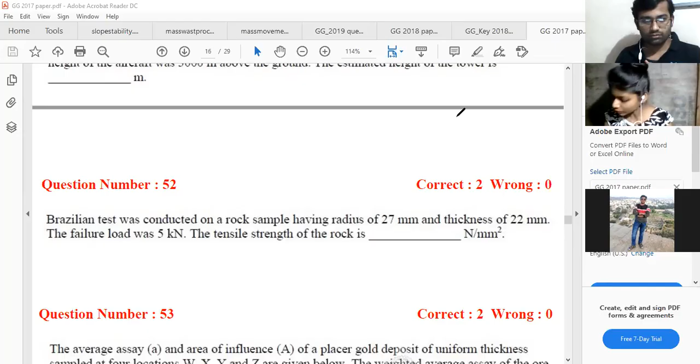Yes sir, but इसमें कुछ दिया नहीं है ना कि यूनिट मतलब कितने डेसिमल थी।

Yes, 2.68 is correct. बट सर इधर तो ऐसा कुछ दिया नहीं है, मेंशन नहीं किया, भूल गए होंगे वो। हाँ हमारी ट्रिक गड़बड़ हो गई ना। But in maximum cases you will get this instruction, up to 2 decimal place. I don't know why here is not mentioned। जनरली सर फिर 1 या 2 डेसिमल तक ही लिखना पड़ता है ना वैसे भी। हाँ नॉर्मली 2 डेसिमल।

अगर आप करेक्टली फॉर्मूला जानते हो और आंसर आ ही रहा है तो वैसे ही लिखो, ओके। यस सर। और जब गेस करते हो या फॉर्मूला नहीं मालूम तो उस केस में थोड़े थोड़े हिंट देखने पड़ते हैं। So here you know the formula, you can directly calculate with the help of formula। 2.68 Newton per mm square। फिर भी मुझे आंसर किसी का ही नहीं आया। अच्छा वो अप टू 2 डेसिमल की वजह से कंफ्यूज हो रहे थे क्या?

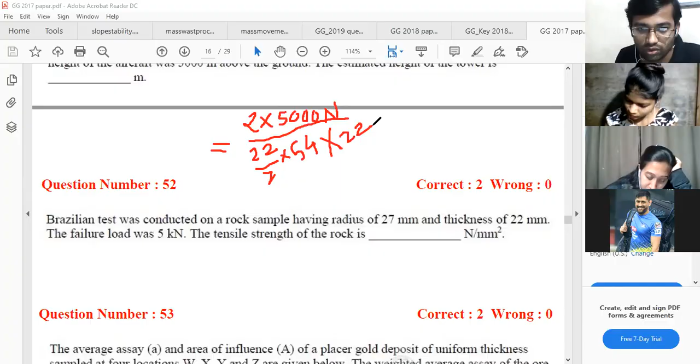22 by 7 multiplied by d, diameter, radius is given 27 mm, so double कर देंगे, we will get 54 mm, multiplied by pi d l. L is again thickness is given 22 mm, so 22 mm square। तो unit आ गया। So you can calculate this numerical with the help of unit also, very easy if you don't know the formula, still you can calculate with the help of unit।

Yes, but ये दो हम guess नहीं कर पाएंगे। So 22 by 7 कैंसिल होगा क्या? नहीं होगा। मैं ऊपर डाल देता हूँ इसको।

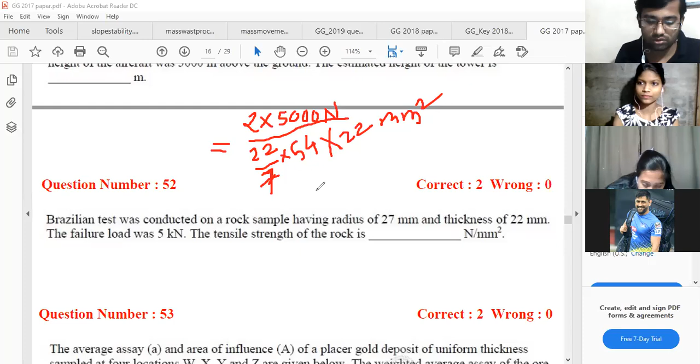So 22 multiplied by 22 multiplied by 54, 26136, 10,000 multiplied by 7, 70,000, 26136। So 2.67, okay, or 2.68, I will write 2.68 after rounding off। Final answer. Clear? Any doubt?

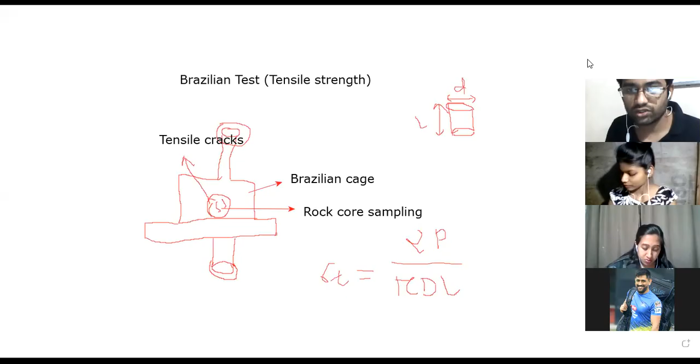Next is flexural strength. Okay, now this strength will come in play when we need to construct any beam or we need to check the strength of a beam। जो हम कंस्ट्रक्शन में बीम्स यूज़ करते हैं, स्लैब वगैरह डालने के लिए, for that beam you need to check this flexural strength।

Okay, this is what we are doing। We are using a cuboidal block, your beam, sorry, I will use cube here। Okay, sustain, so we are putting that particular rock like this।

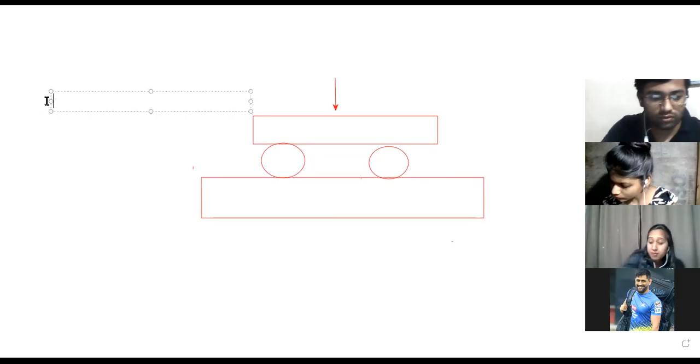Now, दो सर्कल के ऊपर बीम को रख दिए। This is actually your basement, and this middle one is your sample। Now two circular blocks are used to balance the beam।

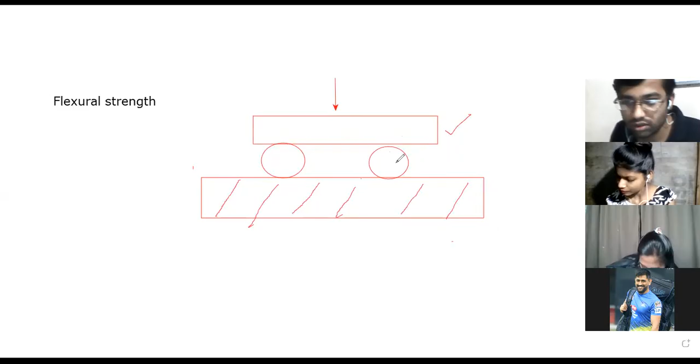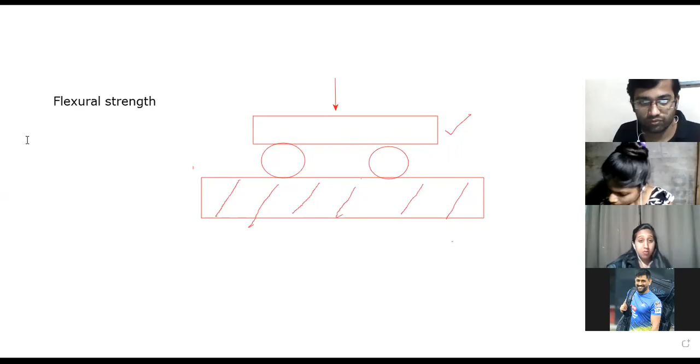And now we are applying vertical pressure। So here actually we are looking for transverse strength, what we are looking for, transverse strength। So if you are searching for bending loads, just like we need to construct the beams, you need to check whether it withstands particular pressure or not, otherwise ये bend होगा या break down हो जाएगा।

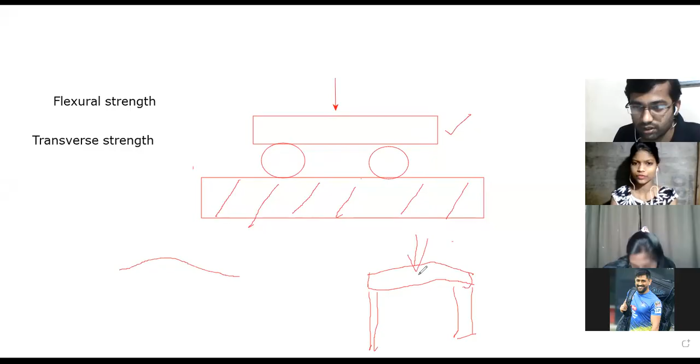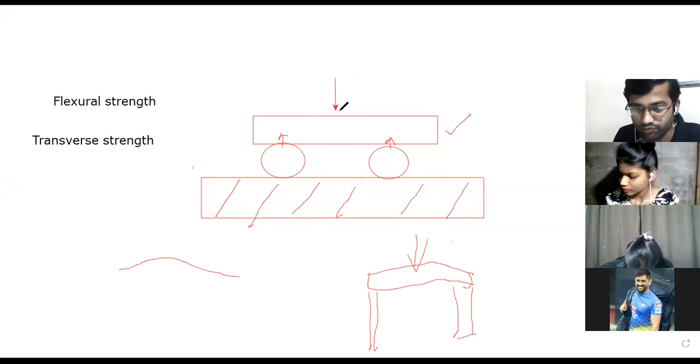For this reason we are doing this, because in construction what we are doing, ऐसे beam लगाएंगे। Now this beam is balanced with pillars like this, so instead of the pillars we are using here circular blocks at the ends of the beam। And now we are putting pressure at the center from vertical downward। So here two blocks are exerting the pressure from downward on the beam and from the above, so 3 points are applying the pressure।

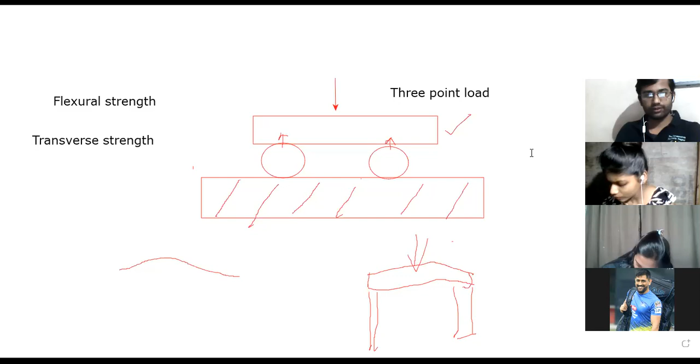So this is called as 3-point load, this test is called as 3-point load test। कर लिया ड्रॉ? Done, sir।

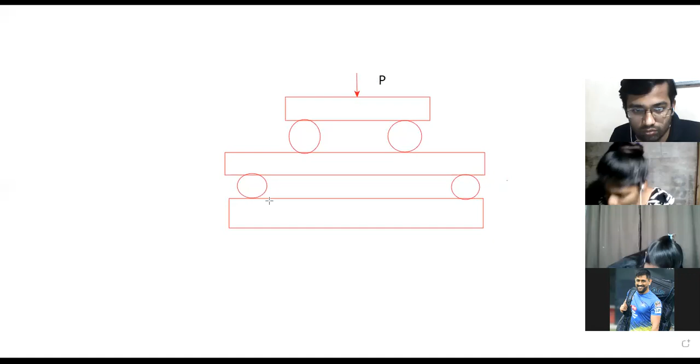Now again we have one more, 4-point load, एक से पहले दो। And this is your basement, like this। This is your basement, or you can say foundation for this particular test।

Okay. Now this is 4-point flexural strength test. Previously we have seen 3-point test. Okay. So here you can see 1 point, 2 point, 3 point, and point number 4. Okay. So this is your 4-point flexural.

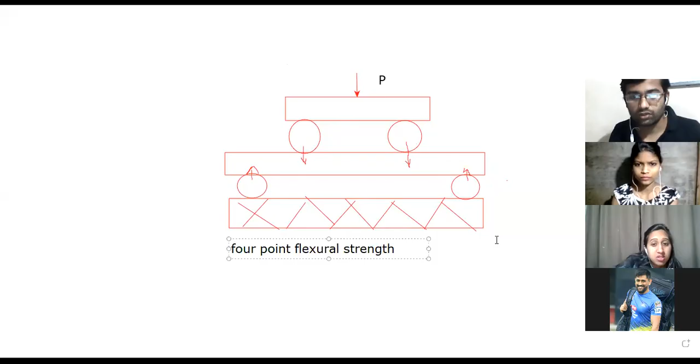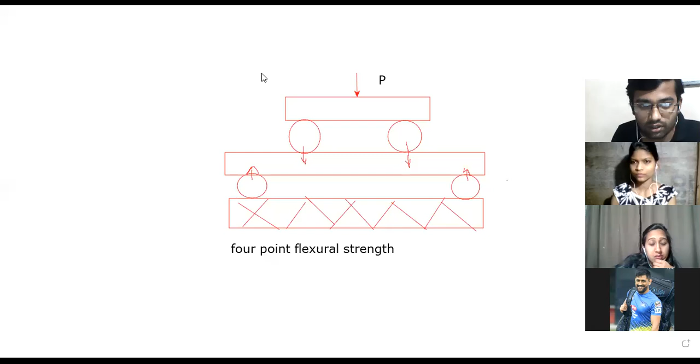Here P is on this beam. Okay, actually we are looking for this beam. Okay, this is our sample, okay, not this. Okay, got it. Okay, thank you. Okay, actually we are looking for this sample. Okay, I will use star mark here. Four-point flexural. Yeah.

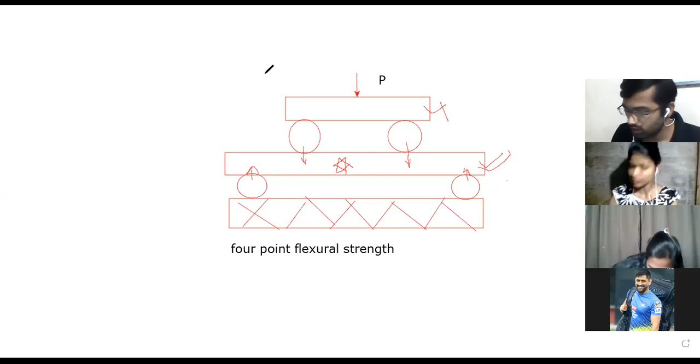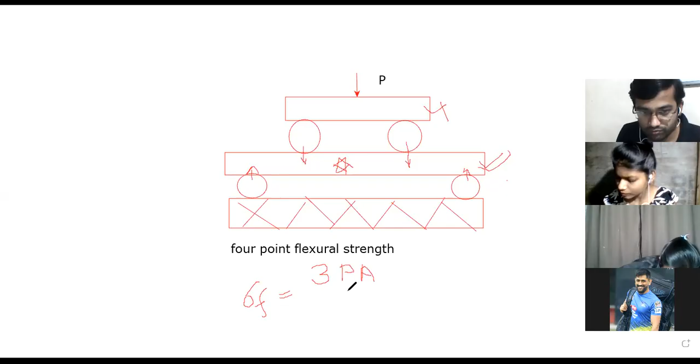So again we have formula for both 3-point and 4-point. So first write here formula for 4-point, sigma f. Okay. F representing flexural strength. 3PA divided by BD square. Okay. Again, P is the load at failure. Okay. A is your area. B is your width. Okay.

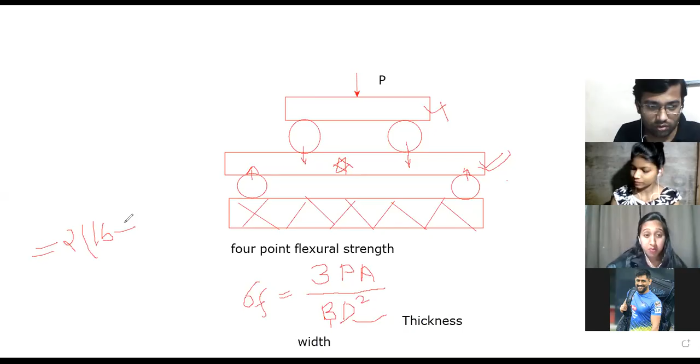Twice bracket L plus B plus, sorry, D is your thickness. LB plus BH plus HL. Okay.

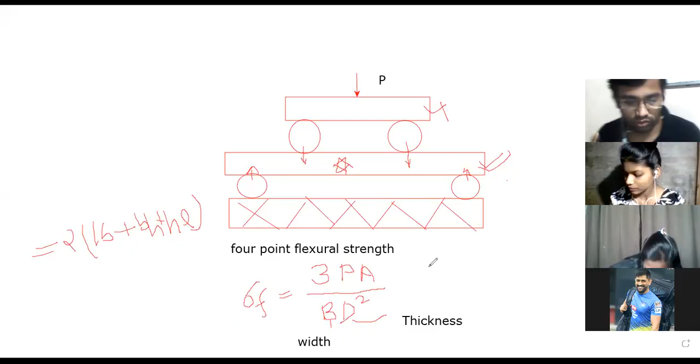Okay. See, basic mensuration formulas, you need to learn all the formulas. Mensuration for your ore geology actually. If they are saying your ore body is in cuboidal shape, so in that case, you need to calculate the volume of your cuboidal ore body. You should know this. At least volume. Clear?

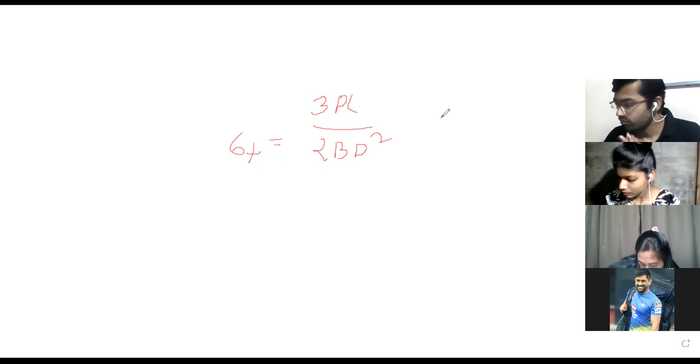Next, formula for 3-point. Okay, 3-point load. Sigma F is equal to 3PL divided by twice BD square. Okay. L is your length. Is it sigma T? Sigma F. Flexural strength. Clear?

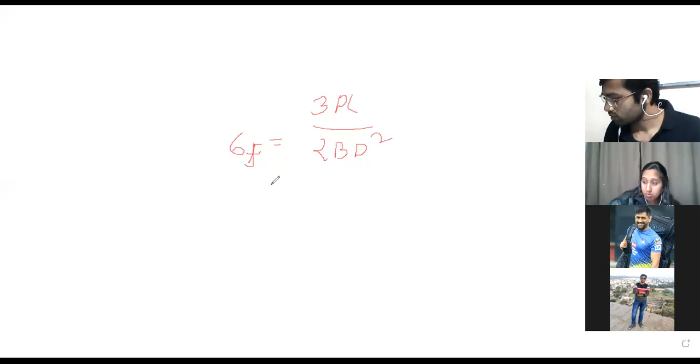Again, next property. Okay. Now we'll look for elastic properties. Elastic properties of rock. So we already studied about elastic properties in structural geology. And we'll again use the same formula, that is modulus ratio is equal to E divided by UCS. Now you will tell me what is E.

Unconfined compressive strength. E, I am talking about E. Elasticity. Extension. No. Okay. Think about the first numerical. We already used this formula in first numerical. Remember? Young modulus. Yes. E is your Young's modulus. Unconfined compressive strength UCS and modulus ratio. Okay.

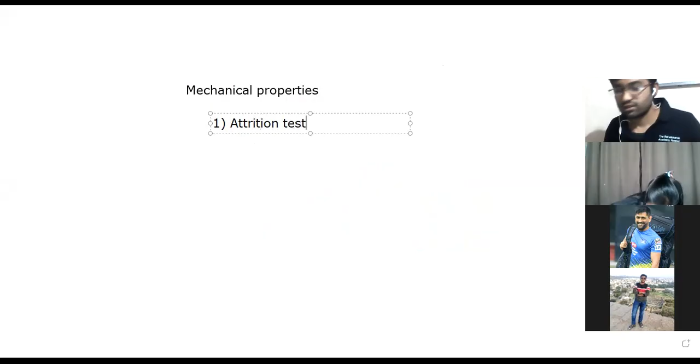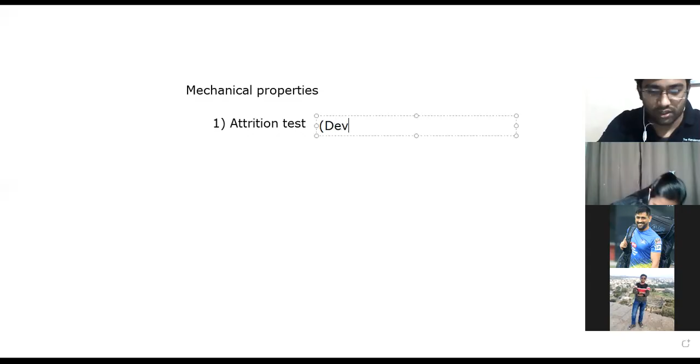Based on this formula, we already did a numerical. Next is your mechanical properties. Here we'll see first attrition test. Okay, now you know the attrition. What is attrition? For this test we use Deval's testing machine. Deval's testing machine.

Okay, what you will do? What is the attrition? Tell me first. Mutual collision. Yes, mutual collision. So what we do? We'll put the sample in particular chamber. Let's say this is your chamber. We put the sample in particular chamber along with the other rock fragments.

And we'll rotate the chamber so many times, so that all the rock fragments and sample can mutually collide with one another. And after doing particular rotation, some number of rotations are fixed, or duration is fixed. Let's say we are rotating for 1 hour. So after that we'll collect the sample.

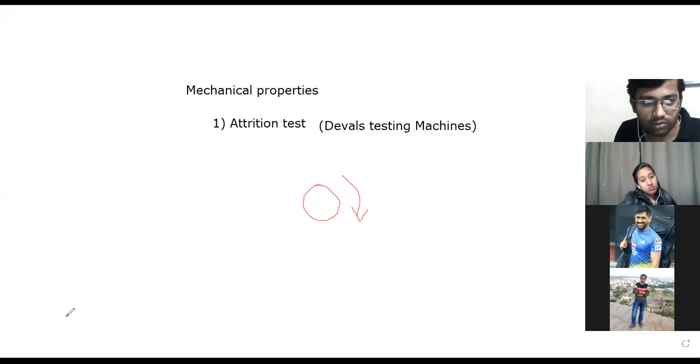Okay, we know the, yes, like a ball mill. Okay, and after the particular rotation or after the duration of particular time, we'll collect the sample. Now we know the quantity of the original sample जो हमने रखा था, and we'll find out the remaining sample.

If your sample is lost more than 3%, then the rock is not good for any construction. Let's say if your percentage of loss is less than 3%, then the rock is good; you can use that particular rock as a building stone or for construction material.

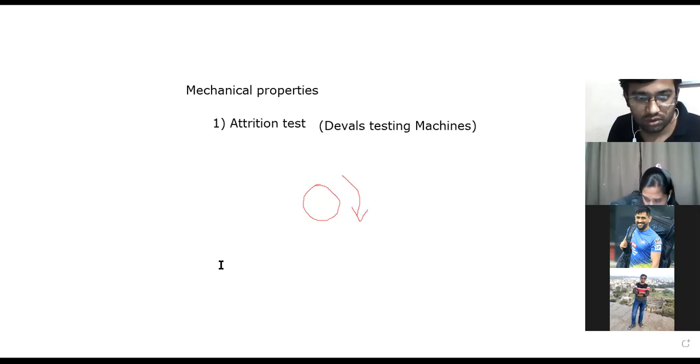So a loss due to attrition and wear, if it is less than 3%, is good. And if it is more than 3%, then it is unsatisfactory.

Okay, so again we have a formula for attrition test: percentage of wear in attrition.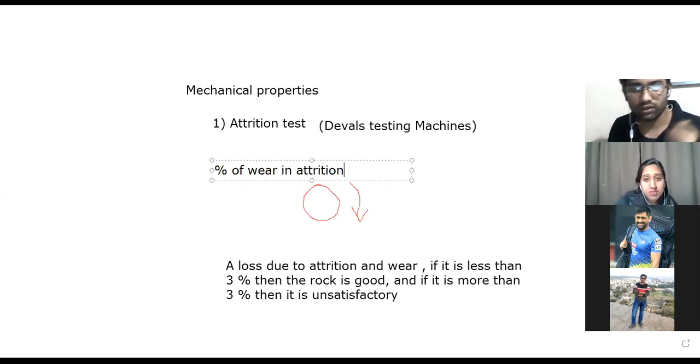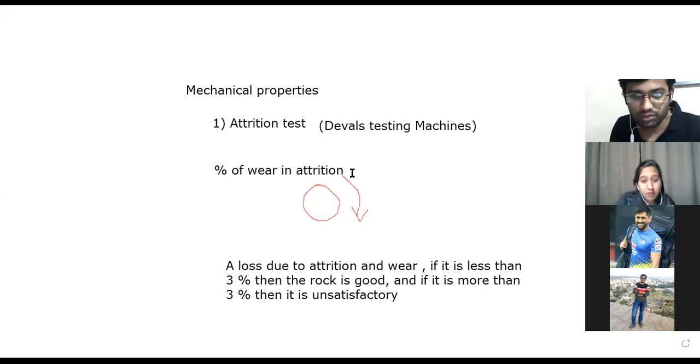If it is more than 3%, then it is unsatisfactory. If it is less than 3%, then it is good, and you can use the rock for your construction activity. So percentage of wear in attrition is equal to m1 minus m2 divided by m1, multiplied by 100.

m1 is your original weight, and m2 is retained material, means weight of the sample after the attrition, after the rotation. So you can say retained weight. m2 is your retained weight, m1 is your original weight. So you should divide with the original weight. Clear? m1 m2 clear हुआ? Yes, sir.

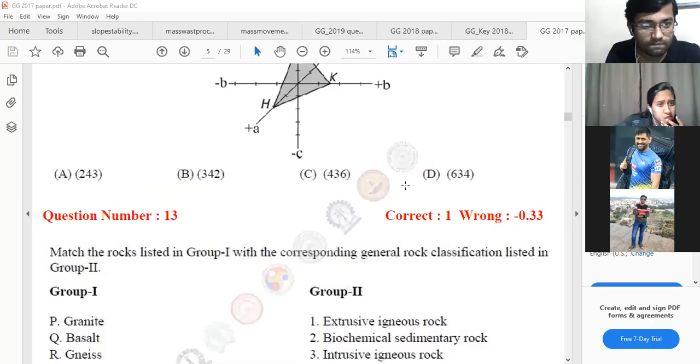Just one second. दिख नहीं रहा. Okay, leave it. I will share numericals on that. So this is about attrition test.

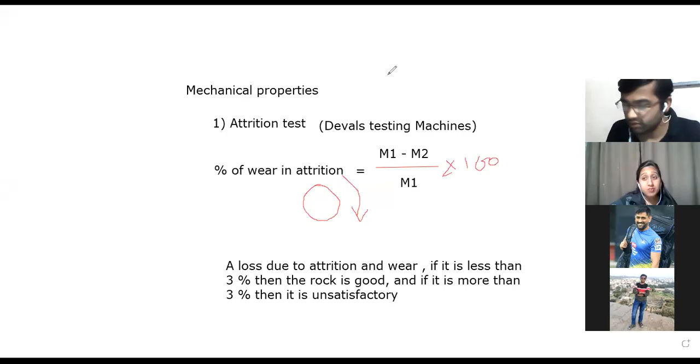Next is Los Angeles abrasion test. What is abrasion? Abrasion is friction between sediment and bedrock. So in abrasion we are rubbing the sample against the bedrock. The procedure is the same, but instead of bedrock, we are using steel balls.

So we'll put the sample. Let's say this is your sample, S. Then we are using steel balls in the chamber, steel balls and rock fragments. Then again we are rotating the chamber and looking for the loss of the sample.

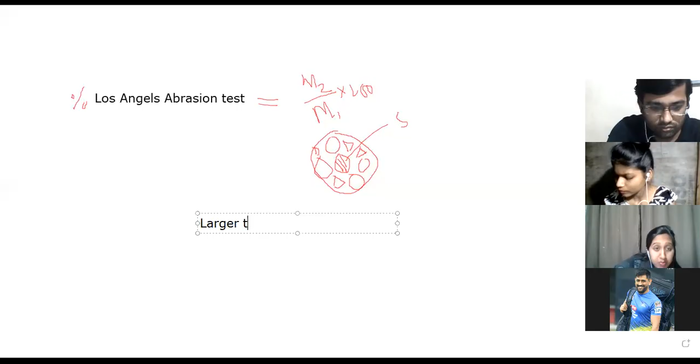Percentage Los Angeles abrasion value is equal to m2/m1 multiplied by 100. m1 is again your original weight, and m2 is your retained weight. So larger the value, weaker is the rock. In this case, up to 50% is permissible. If loss is up to 50%, we can consider it good quality.

Okay. Now solve this note, question number 9.

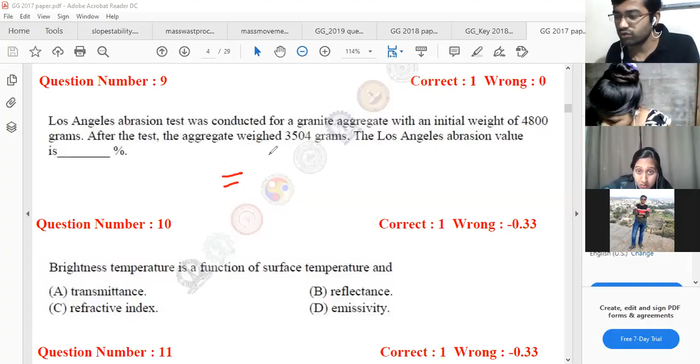What is retained weight here? You need to subtract this 3504 from 4800. Actually, though, the original formula for attrition, you need to use that formula. For retained weight, what you will do? You will do M1 minus M2. Then you will get retained weight. Okay. Divided by M1 multiplied by 100.

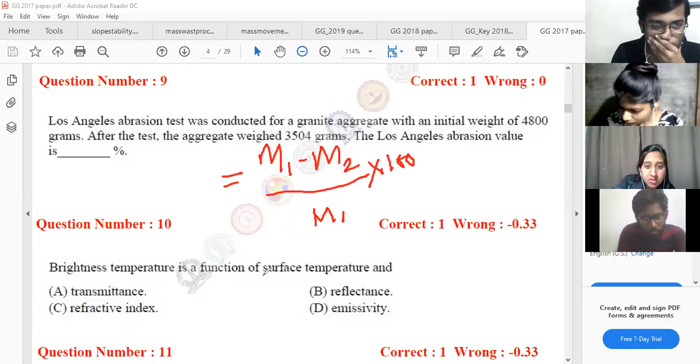Clear? So read the question carefully. Very silly mistake, but 2 marks will be lost. You will lose 2 marks with the silly mistakes. This is the basic formula for attrition test and Los Angeles abrasion test. Both are similar. Procedure is similar somewhat. Yes, just because of the rolling mechanism, you will lose some sample. That is the reason. They are different. Clear?

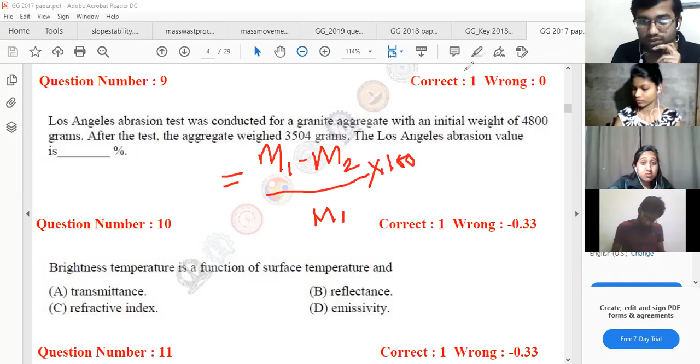Everyone is getting 27%. M1 is 4800, minus 3504, divided by 4800, multiplied by 100. You will get 27%. So here this M2 actually is not given directly.

Next is toughness test. For this we use aggregate impact test. Now in this case we'll consider the aggregate. Again we'll exert pressure on the aggregate, by rolling between the fragments or by impacting with some objects, and we'll test the impact value. We'll go for impact toughness value.

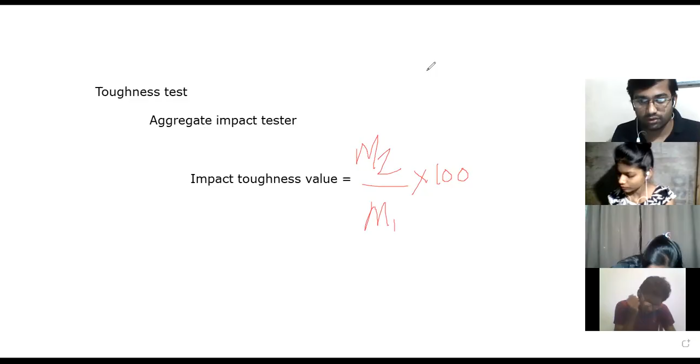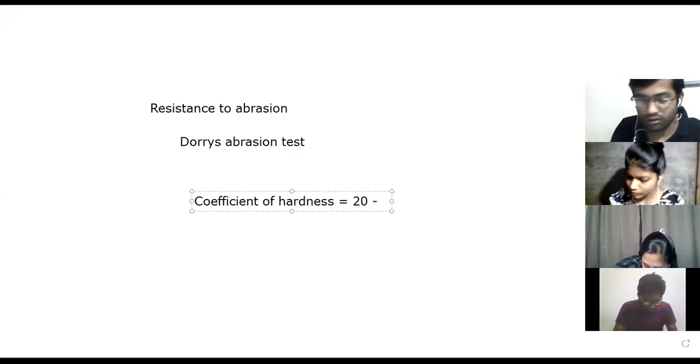Next is resistance to abrasion. For this we have Dorry's abrasion test. Coefficient of hardness is equal to 20 minus, in bracket, loss of mass in gram divided by 3. Resistance to abrasion means we are actually looking for hardness of the particular sample.

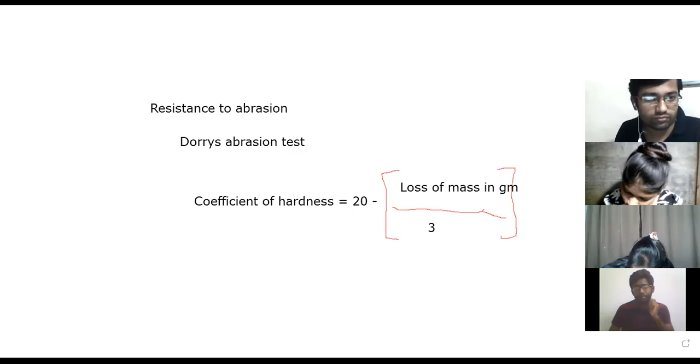Clear? So what we have done here, we studied all the possible tests and the formulas. From all the possible tests, 3-4 tests have already come in exams; you have seen the numericals from 3-4 tests. So remaining formulas are also very much important for GATE people. The very basic engineering geology is in syllabus for JAM people, so JAM people don't need to focus much on these tests. You should have a basic idea about this. In engineering geology you will focus on the dam and tunnel part, which comes after this.

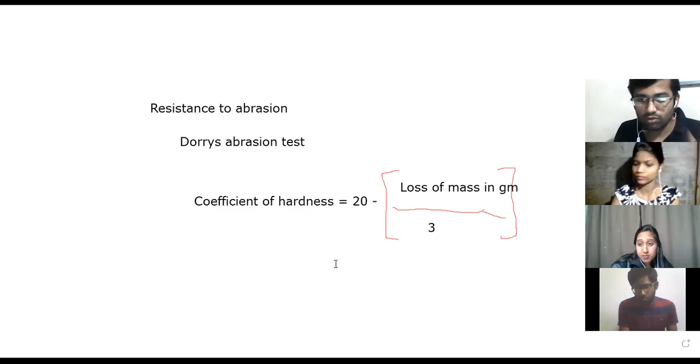So this is all about the tests, various tests and their formulas, by which we can gather information about the strength of the rock, tensile strength of the rock, hardness of the rock, stress and strain conditions. Clear? Now our last parameter is rock mass rating. This is the final and very important parameter. Rock mass rating consists of 6 different parameters, or 6 different studies. After doing all 6 studies, we'll give a final conclusion about the particular rock.

So it includes number 1, UCS, uniaxial compressive strength, and you know how to calculate UCS. Clear? Then number 2 is your RQD. You know how to calculate RQD. I just simply add 2 more formulas for RQD. Just wait. You know the basic formula for RQD.

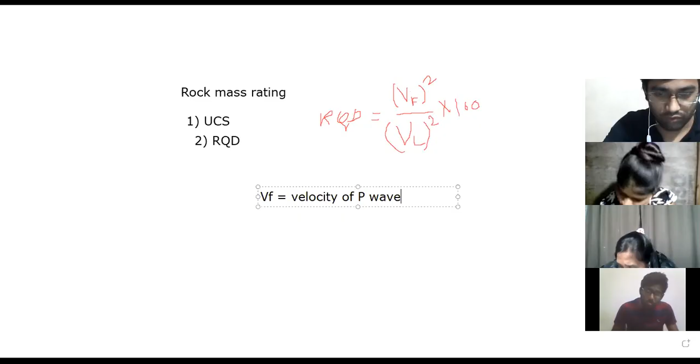RQD in terms of velocity of waves: VF square divided by VL square, or you can write whole square for both, multiplied by 100. So VF is your velocity of P wave in field. VL is your velocity of wave in lab.

And one more formula. RQD is equal to 115 minus 3.3 JV. Here your JV is joint volumetric count. Okay, so joint volumetric count means in a particular rock sample, you will count the number of joints.

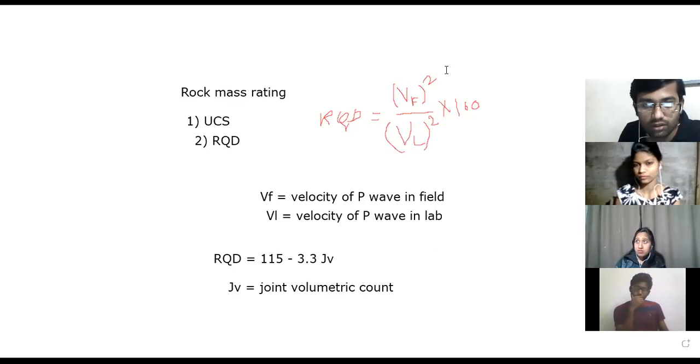Okay. Two additional formulas for RQD. Okay, done.

Number 1 is your UCS. Okay, then number 2 is RQD. Okay, number 3, spacing of discontinuities. So you will see the discontinuities, how they are placed. Okay, they are very close, or they are far away from one another, like this. Okay, so this will give you an idea; a discontinuity is nothing but breaks in the rock.

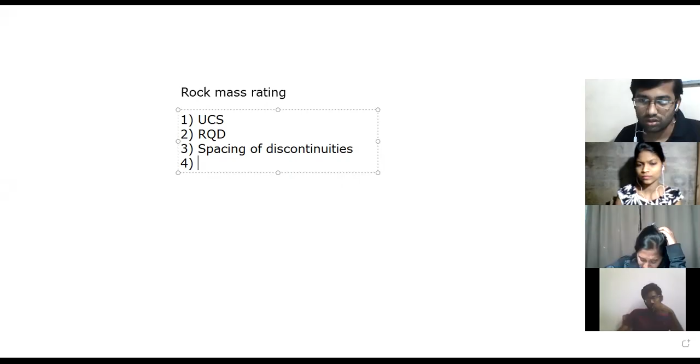Okay, so we'll search for spacing of discontinuity. If they are very closely spaced, what can you infer from this condition? If they are very closely spaced and there are so many discontinuities, you will understand the rock is under great pressure, and the rock is quite weak and is not able to withstand the particular pressure. Okay, clear? Then number 4, condition of discontinuities.

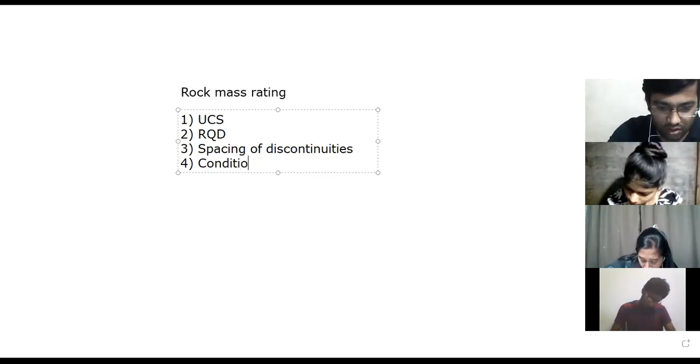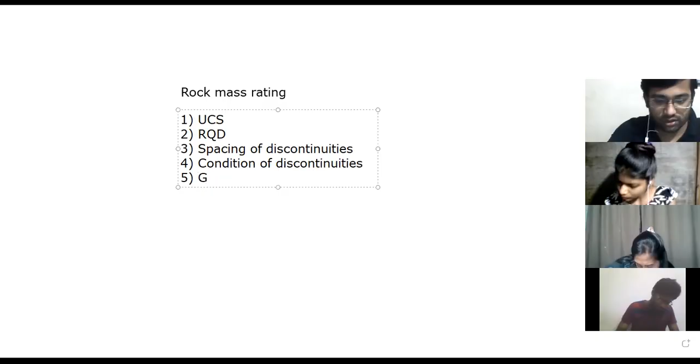Okay, first you will check the spacing, whether they are closely spaced or far away from one another. Then you will go for the conditions of discontinuities, like they are very small, very big, highly fractured. And number 5, groundwater condition. Check the groundwater conditions, means you can see the porosity, permeability, from which you can come to know about the groundwater condition as well.

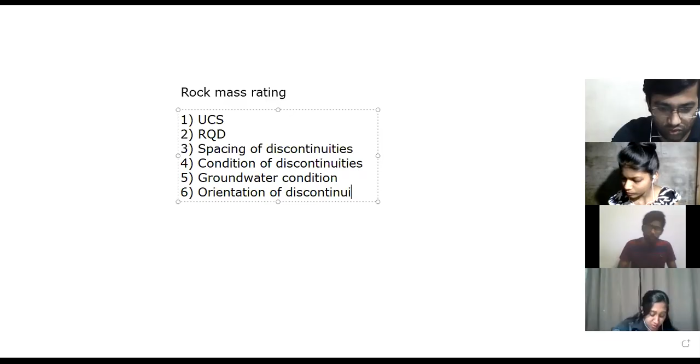And next, orientation of discontinuities. Okay, so here discontinuities means all the weakness or all the weak spots: smaller fractures, micro fractures, micro faults in rocks. That rock is not good for any construction activity if it has so many closely spaced discontinuities. Orientation: what can you infer from orientation of discontinuities?

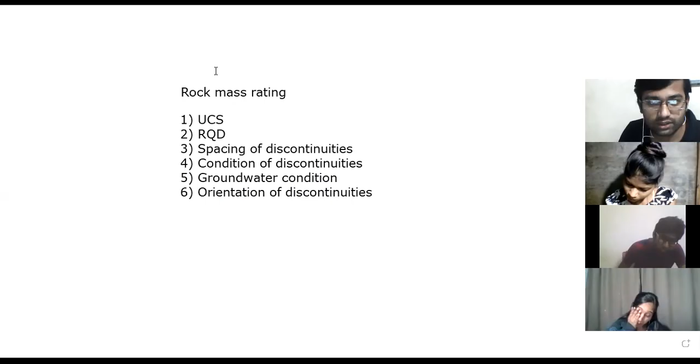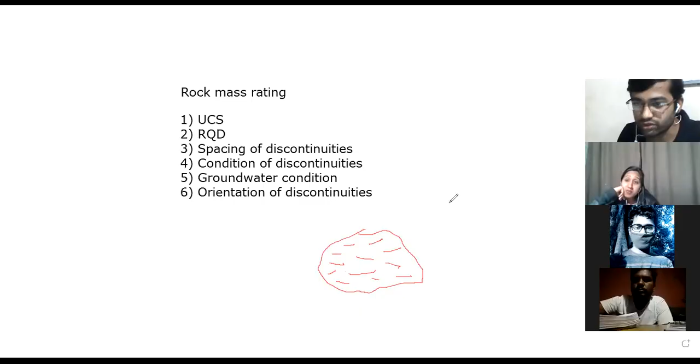Let's say this is your rock, and you are getting all the discontinuities in this direction, oriented like this. So what information can you gather from such a condition? We can say that the forces or pressure were acting in a particular uniaxial direction. You can calculate the direction of pressure from the discontinuities. You will get a rough idea about the direction of pressure. Clear?

Okay, so in rock mass rating, we need to study all these 6 parameters very thoroughly, and studying all these 6 parameters and their values will give our final conclusion. That combined study is called rock mass rating. For the final conclusion, we need to draw one table: 6 columns, 5 rows.

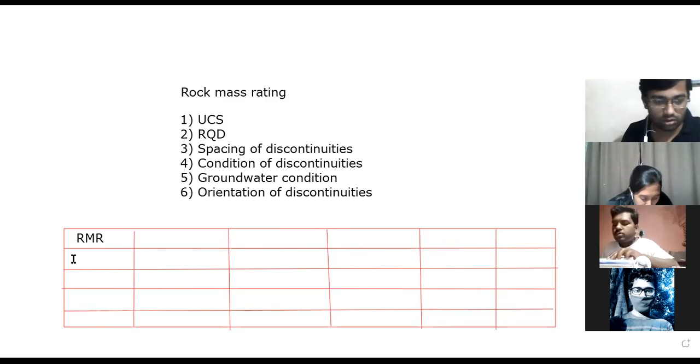Okay, here you will write RMR, rock mass rating. Then here class, description.

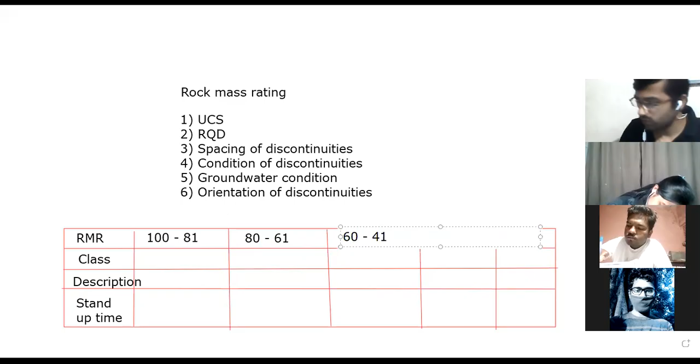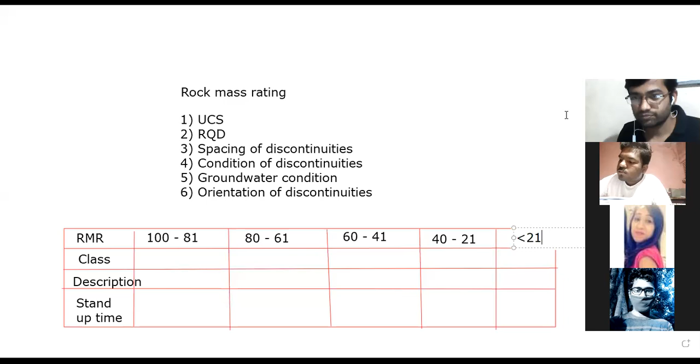Okay, stand up time. Here 100 to 81, 80 to 61, 60 to 41, 40 to 21, less than 21. Okay, here 2, 3.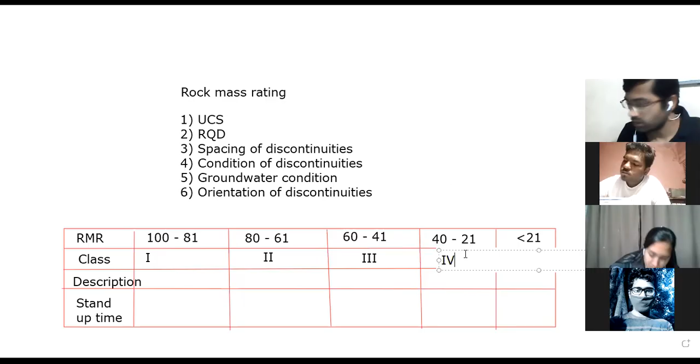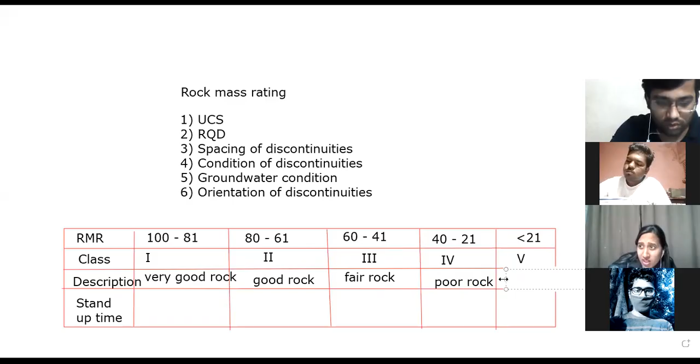Very good rock. Good rock. Fair rock. Poor rock. Very poor rock. Okay, so your stand up time is 20 years, 1 year, approximately 1 week, approximately 10 hours, minutes, like this.

Okay, so we'll do this study for any construction or big structures before construction and also after the construction, for monitoring purpose. If you are getting RMR between 81 to 100, you will say stand up time is 20 years maximum. But still you can find so many dams standing or working more than 50 years, more than 100 years, like Three Gorges Dam, China, Idukki Dam in Kerala, and many examples.

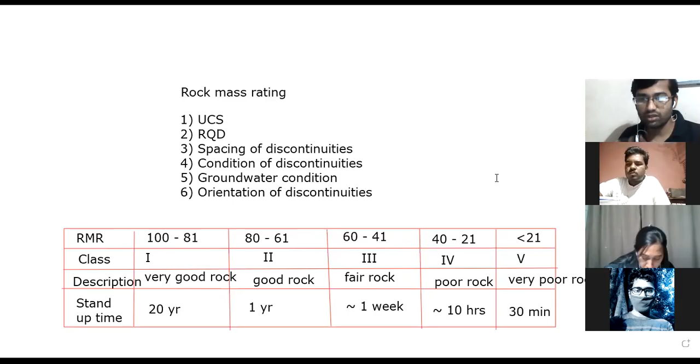They will collapse anytime, but we are monitoring them and doing whatever we can to stop any hazard. So monitoring is very much important. If you are getting cracks or fractures somewhere, you will reinforce them, seal the cracks, and make the foundation stronger by grouting. Grouting means we'll pour cement slurry in the foundation. That is called grouting.

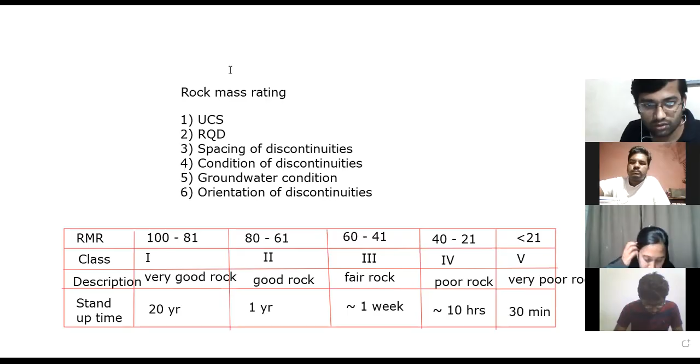Okay, and we have some methods. I will give you a rough idea. Let's say this is your hill, and you are getting fractures, let's say like this.

You have such fractures in your hill. Okay, so what you will do? You will go for bolting, like this. जैसे कील ठोक देते हैं ना, same process like a nail. We'll insert the bolt at a particular spot to hold the rock. This is called bolting.

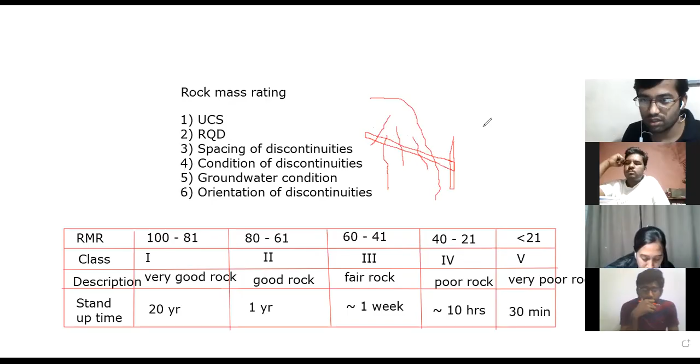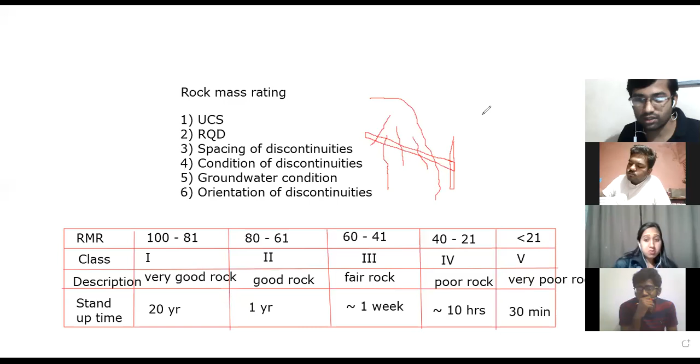If your foundation is weak, then you will pour cement slurry at the foundation. That is called grouting. And beside the roads in hilly terrains, you will observe some nets are placed. Net लगे रहते हैं कई कई जगह पे. They'll place some nets, and those nets are used to avoid rockfall.

Some smaller hills are covered with nets to avoid rockfall. तो rocks जो है rock fragments रास्तों पे ना आ जाए. That net will avoid the rockfall, so that you can safely go from below or on the roads.

Or you will see some cement retaining walls at the boundary of the hill, mostly in hilly terrains. घाट पे देखना, जब घाटी वाले रास्ते से आप जाते हो, you will see some retaining walls. So यहाँ से कुछ गिर भी जाता है, तो यहाँ से क्या करेगा, उसको रोक लेगा to some extent.

If the movement is on a small scale, then these walls are useful. But if the movement is like slumping, these walls are not useful. But ये wall लगाने से पहले we go for stabilization of the particular hill. So many engineering structures we use to make the particular hill stable.

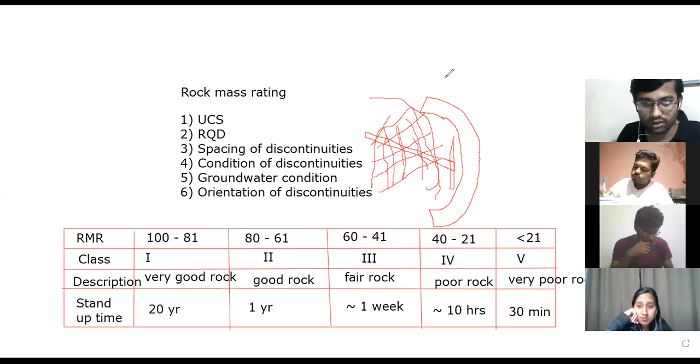So tell me the number of tests. First, unconfined compressive strength, UCS, then confined compressive strength test, CCS, then point load strength test, then Schmidt hammer strength test, then shear strength tests: ring or punch shear test, then shear box test. Then tensile strength: dog bone test, then Brazilian test.

Then flexural strength. Flexural strength किसके लिए useful है? It is useful if you are going for construction of beams. Then elastic properties: Poisson's ratio, Young's modulus. Then in mechanical properties: attrition test, Los Angeles abrasion test, toughness test, and resistance to abrasion, Dorry abrasion testing, coefficient of hardness in Dorry's abrasion testing machine. Clear?

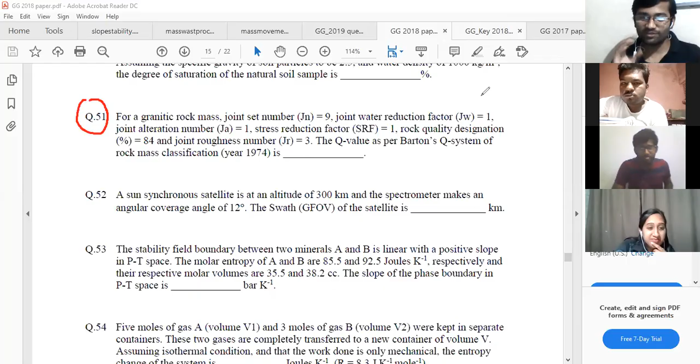Okay, so try to solve this question number 51. First Google the formula, then try to solve the numerical.

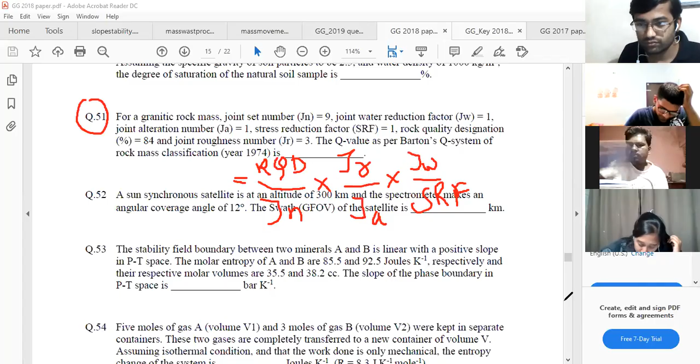And for chemistry numericals, I already told you about some basic chapters of chemistry: electrochemistry, thermodynamics, ideal gas equations, and solution and colligative properties. These three lessons are very much important. You will see one or two numericals from chemistry in GATE exam, and 2 marks numerical in your JAM exam compulsorily.

28 is our answer, yes, 28.

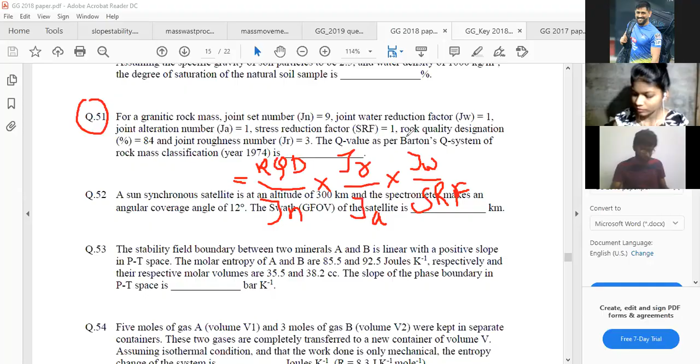Okay, now we have plenty of time for JAM as well as next 1 month for doubts and tests. Try to study as much as possible. If you are studying, then you will face some difficulties. Discuss all the difficulties with us, then we'll arrange some extra classes and solve all the difficulties possible.

The reason behind showing this type of numerical is that you should be aware of such questions. Such questions will go tangentially, because such questions are from research or research papers, or some questions are from research oriented studies.

Okay, so if you know the professor who is preparing the particular GATE exam, at least he will explain such techniques to his students. Okay, only few students are able to tackle such type of questions.